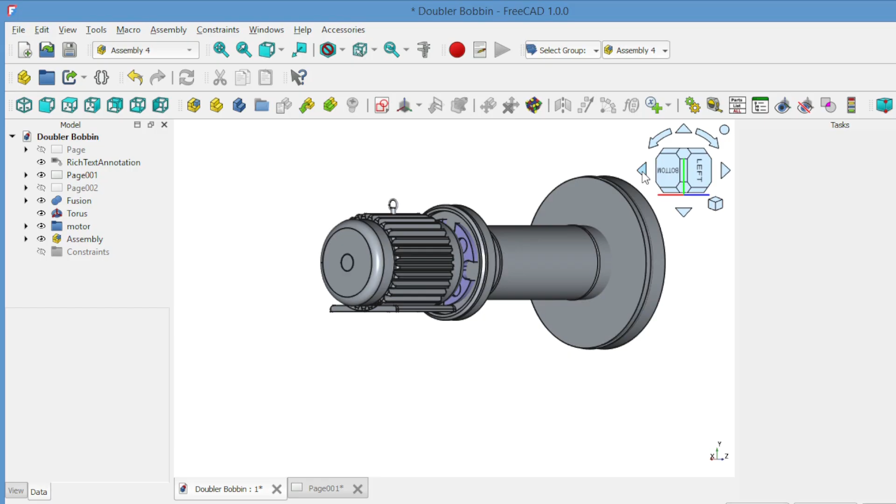Hello and welcome. Today we are going to show you how to create a doubler bobbin and torque motor using FreeCAD. This tutorial is very simple and perfect for beginners. The doubler bobbin is used in rope manufacturing, and in this video we'll also show you how to work on a torque motor spindle through an animation.

Let's begin. First, we'll create the larger flange of the bobbin. Open FreeCAD and go to the sketcher, select the XY plane and click OK. Now choose the circle tool and draw a 50mm circle. This will be the base of the flange.

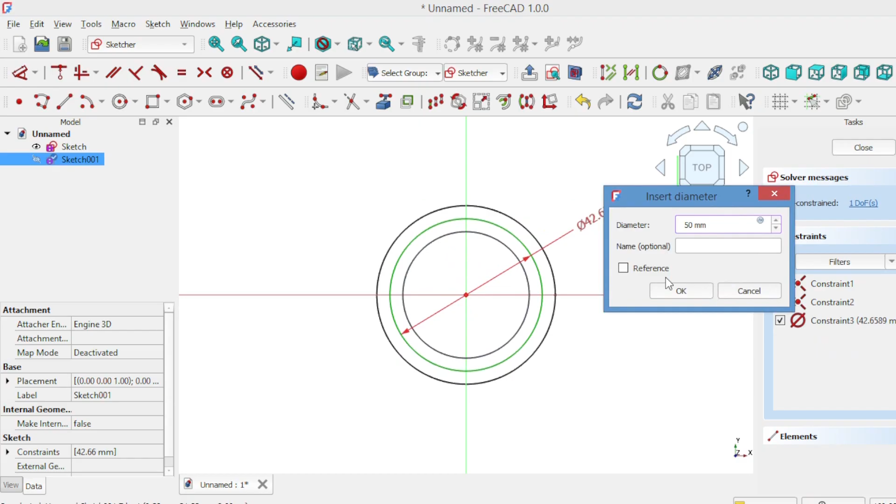Close the sketch. Next, create two more circles with diameters of 50 and 46mm as shown. Close the sketch. Then open another sketch on the XY plane and draw two circles for the middle tube as shown. Close it.

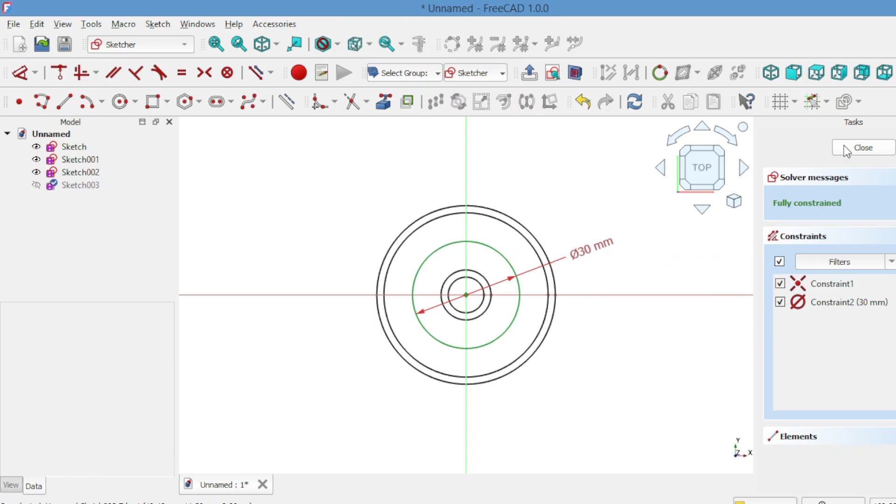Add one more circle of 30mm to fix the metal frame. Finally, create a ring with diameters of 40 and 38mm and close the sketch.

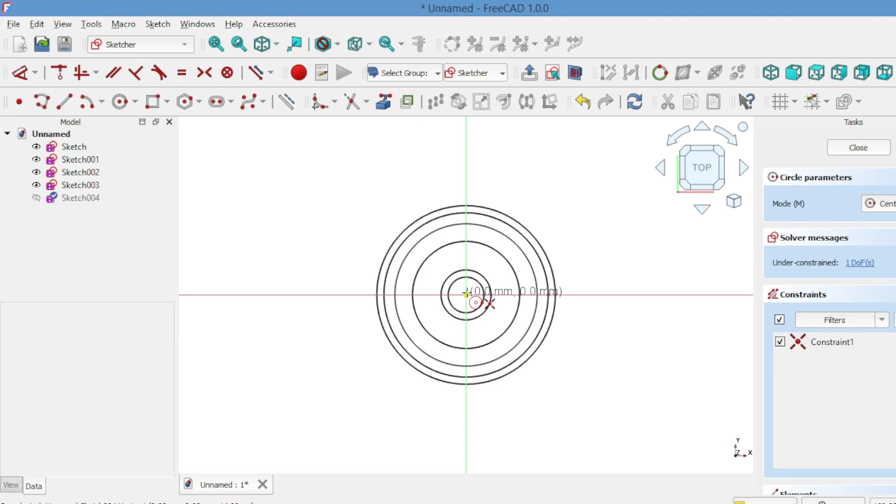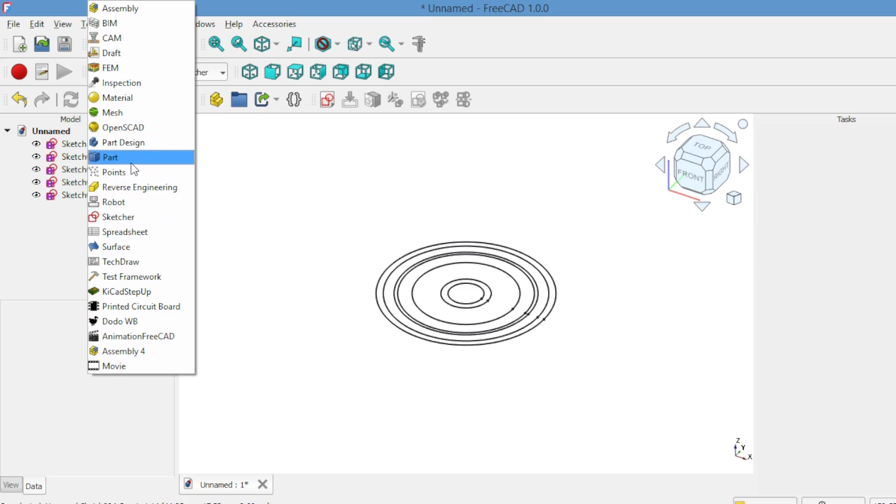Building the bobbin flange. Now go to Part Design and create a new body. Move all your sketches into this body. Using the Pad tool, extrude each sketch one by one.

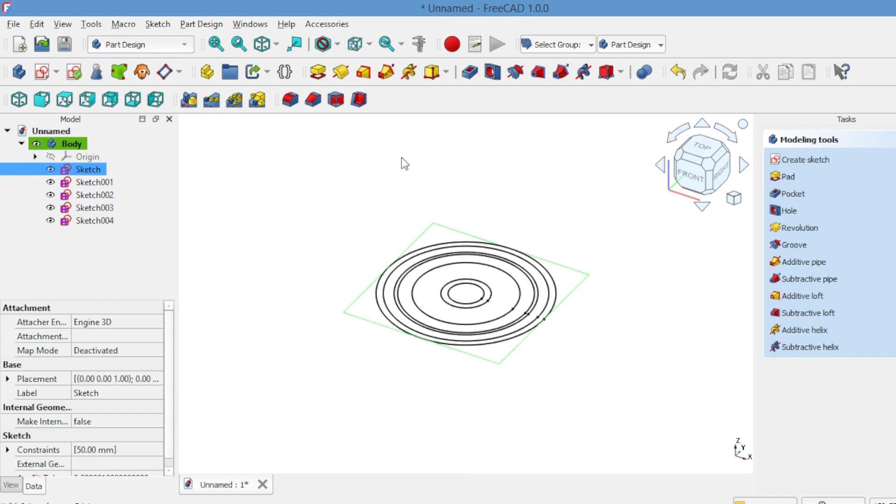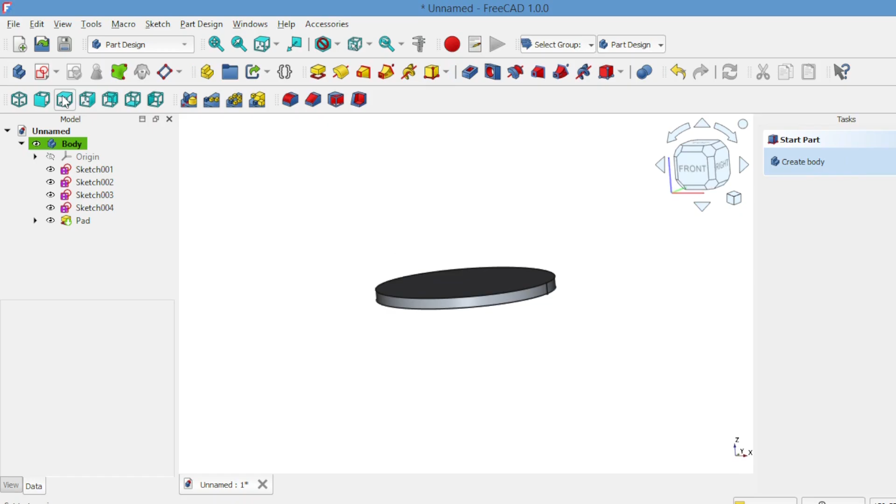Thickness 3 mm, then apply the chamfer tool to smooth the edges. The first circle 6 mm and smooth the edge with the fillet tool.

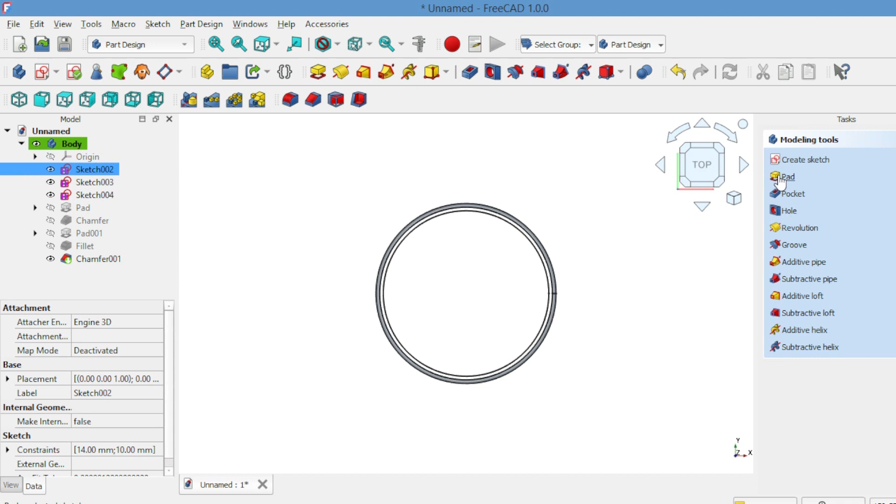The next sketch length 70 mm with reversed checked. The third circle 5 mm. The fourth length, the ring length 5 mm. At this stage, the large flange and the middle tube are ready.

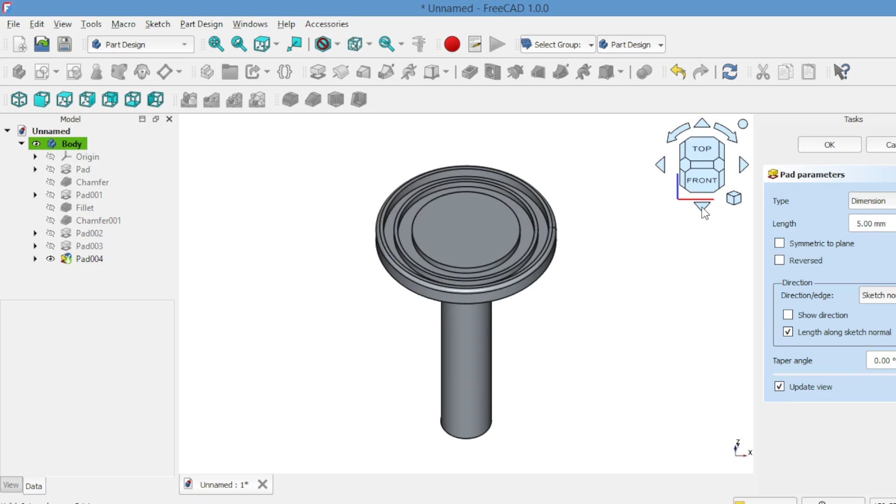Let's make the smaller flange on the opposite side. Create a fifth sketch on the XY plane and draw a 40 mm circle.

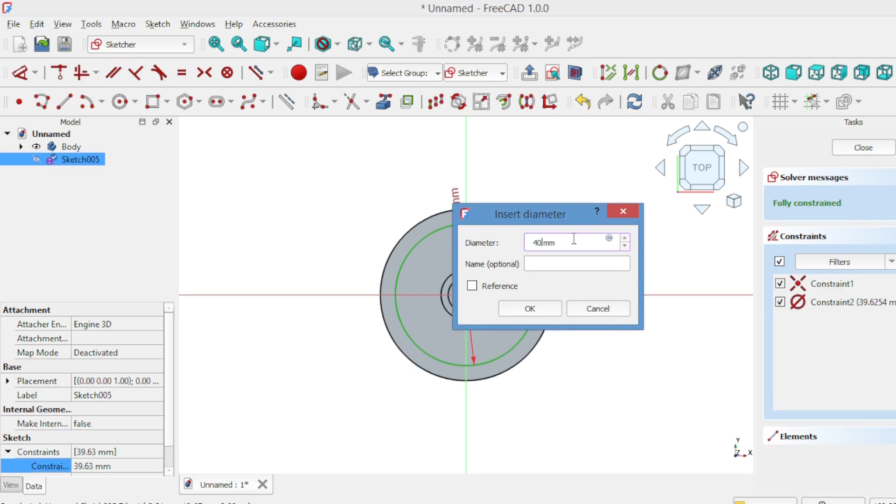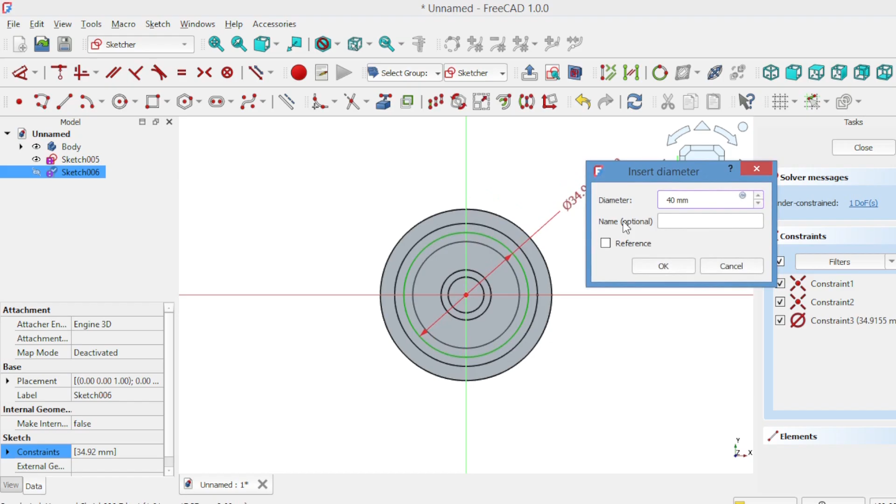In the sixth sketch, draw two circles of 40 and 36 mm. In the seventh sketch, draw a 30 mm circle.

Now create body 1 and move these sketches into it. Transform body 1 to the opposite side.

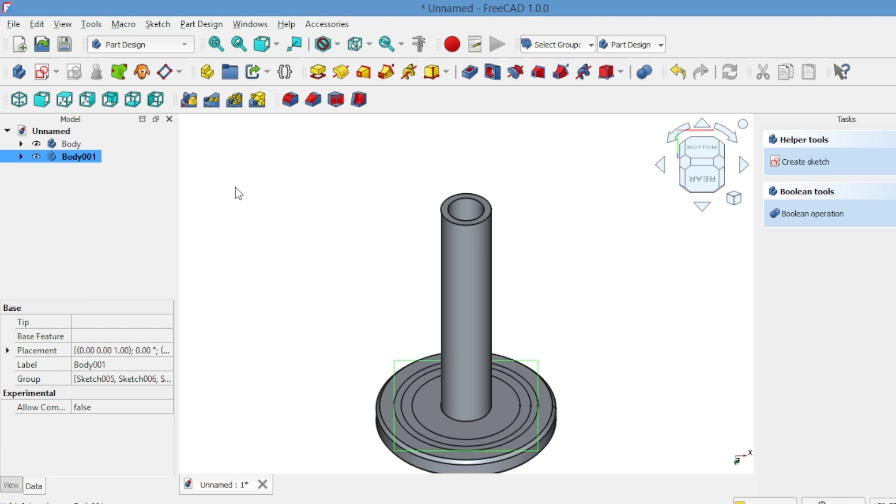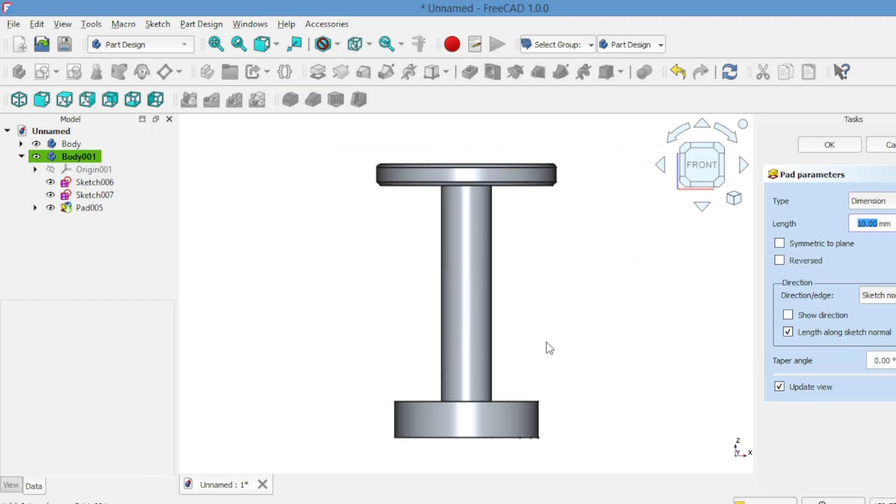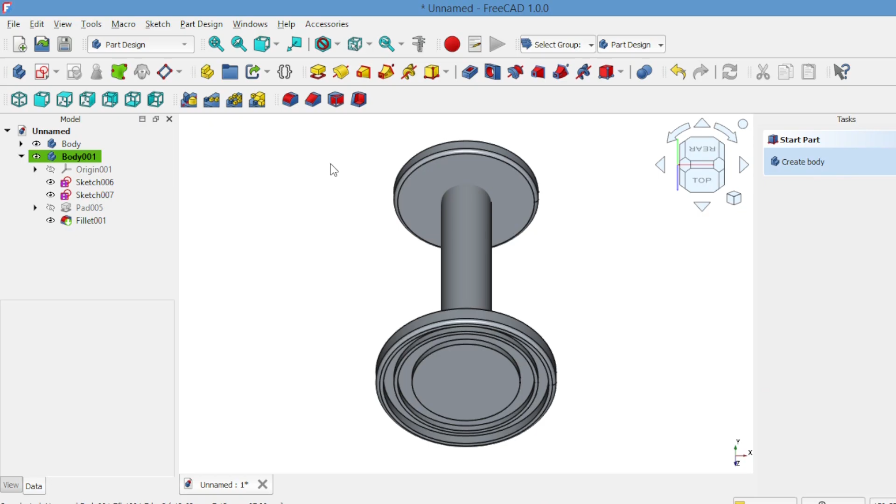Extrude them as follows. Fifth sketch, 4 mm with fillet smoothing. Sixth sketch, 2 mm reversed. Seventh sketch, 2 mm reversed with fillet smoothing.

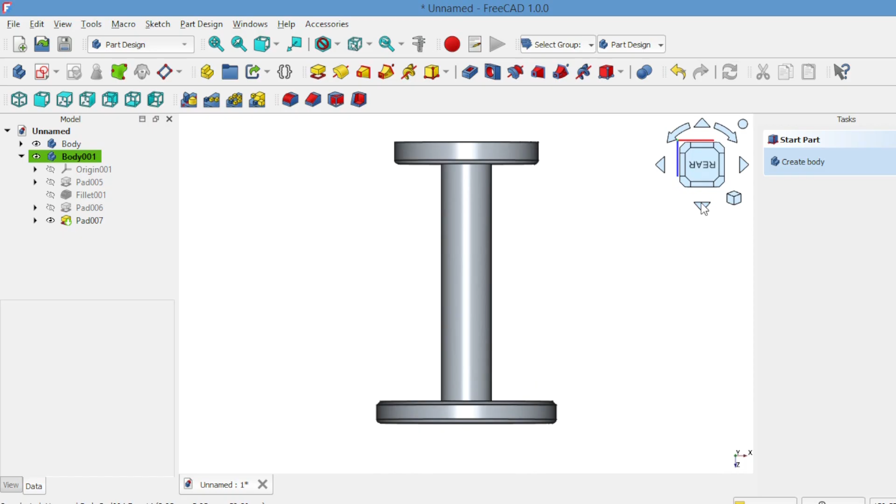Now the outer shape of the bobbin is complete. Adding support ribs and rings.

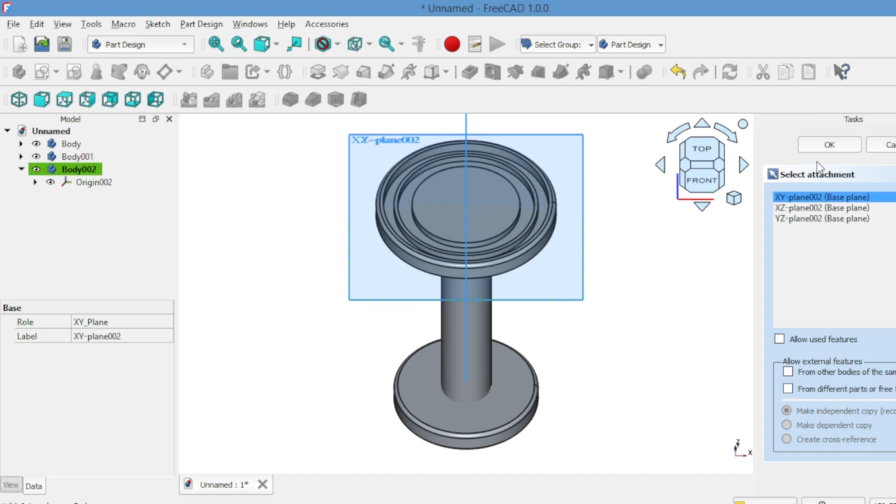Create body 2 on the XY plane. Draw a rectangle on the big flange. And extrude it to 4.5 mm. Smooth the edge with fillet.

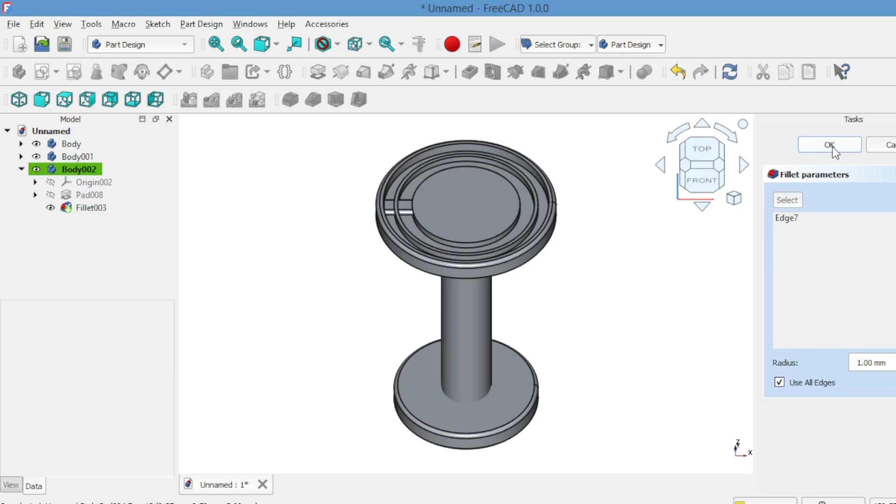Then go to the draft workbench, modification, array, polar array, set the number of elements to 8. Reset the center point and click OK. Now the inner flange has 8 support ribs.

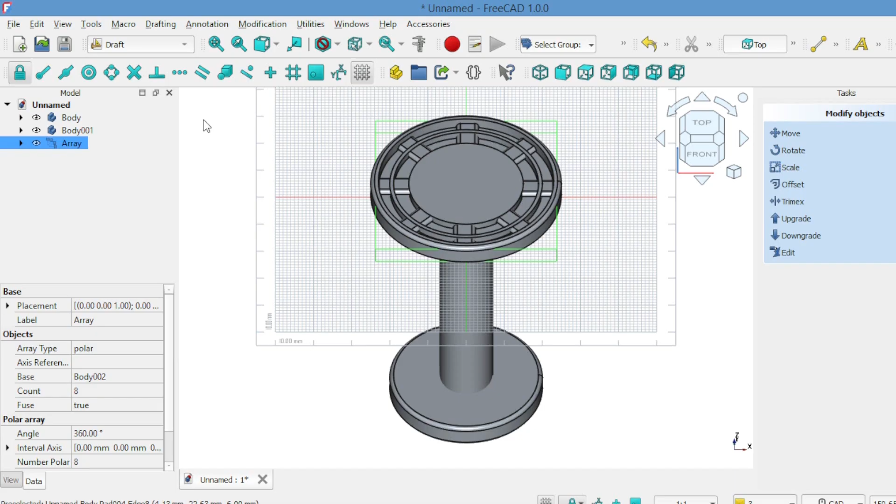Making the stem and middle rod. For the stem, create body 3, draw a 26mm circle and extrude it to 10 mm.

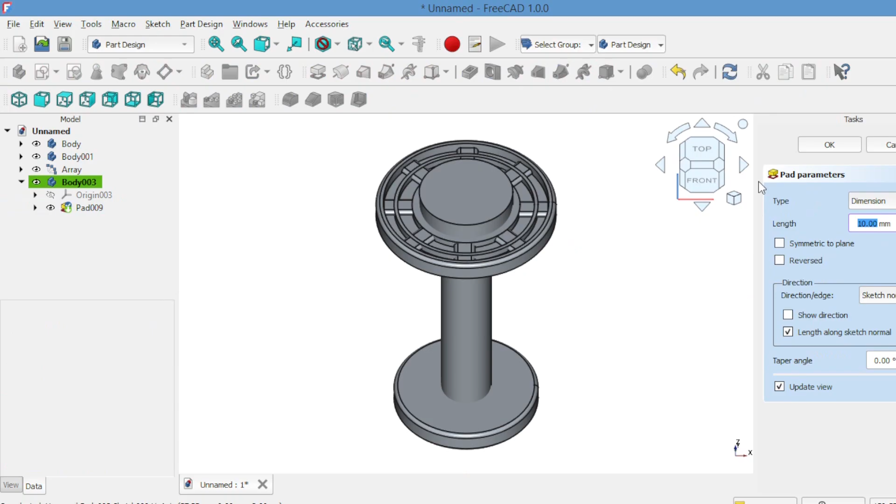Copy and paste it to create body 4 on the opposite edge. For the middle rod, create body 5, draw a 26mm circle, extrude it to 48mm and position it.

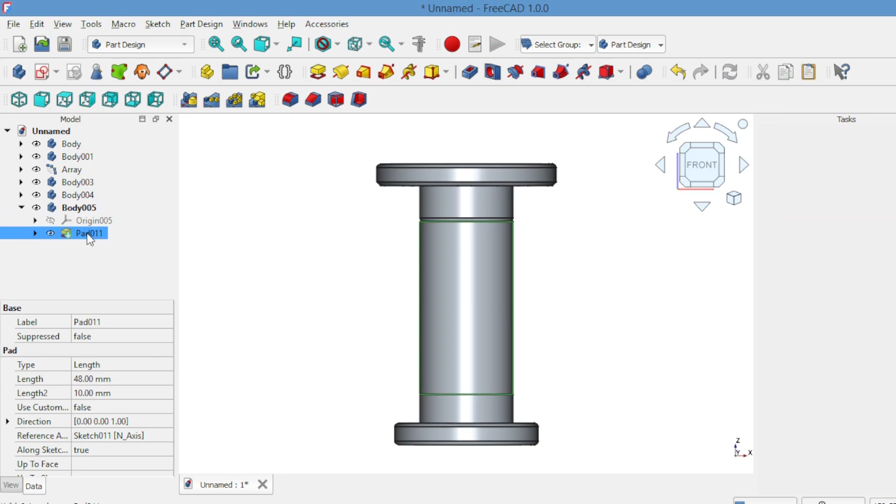For the outer support, use body 7 with the polyline tool to draw a rectangle with rounded corners. Extrude it 7 mm.

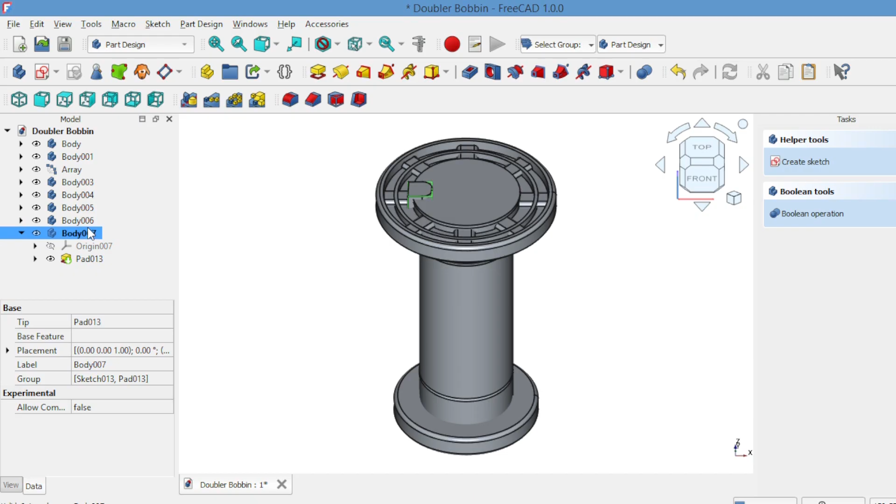Apply polar array with 4 elements. Use boolean cut to trim as shown and copy it to the small flange side.

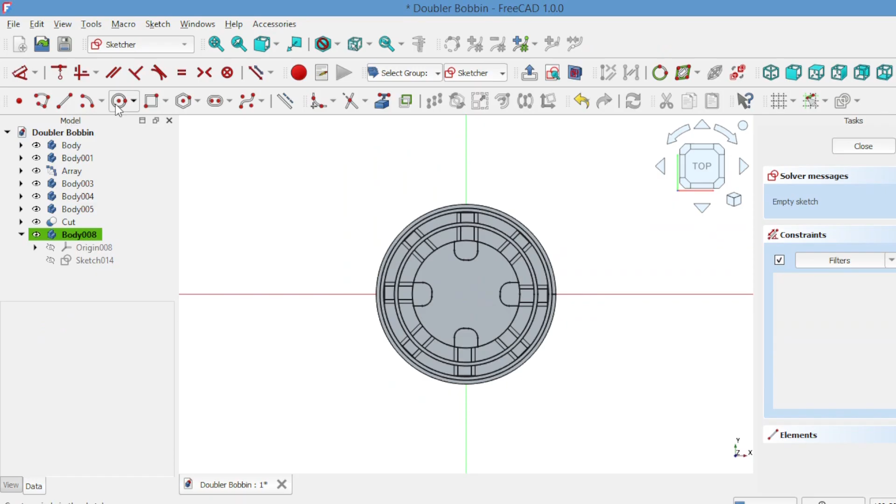For the central rod, create body 8, draw 2 circles and extrude them to 70 mm.

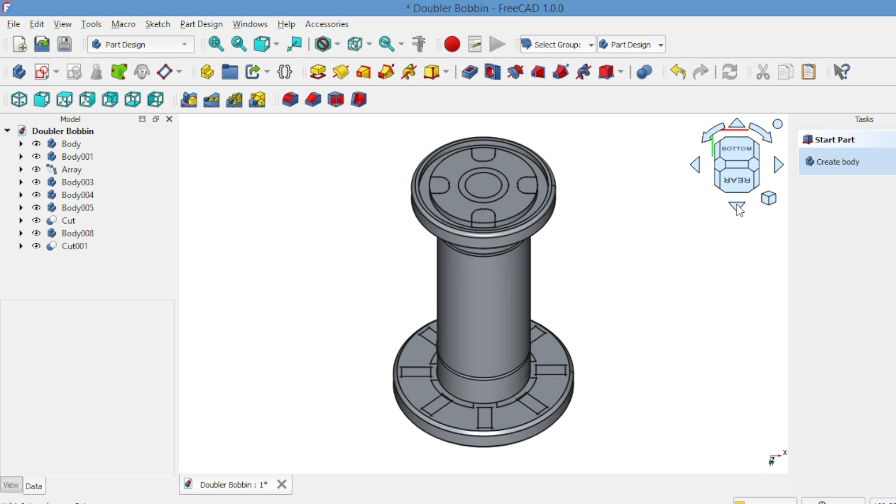For the holding circles, create body 11, draw small circles between the half circles, extrude them and apply a polar array with 4 elements. Perform a boolean cut to create 4 holes. Repeat the same process on the small flange.

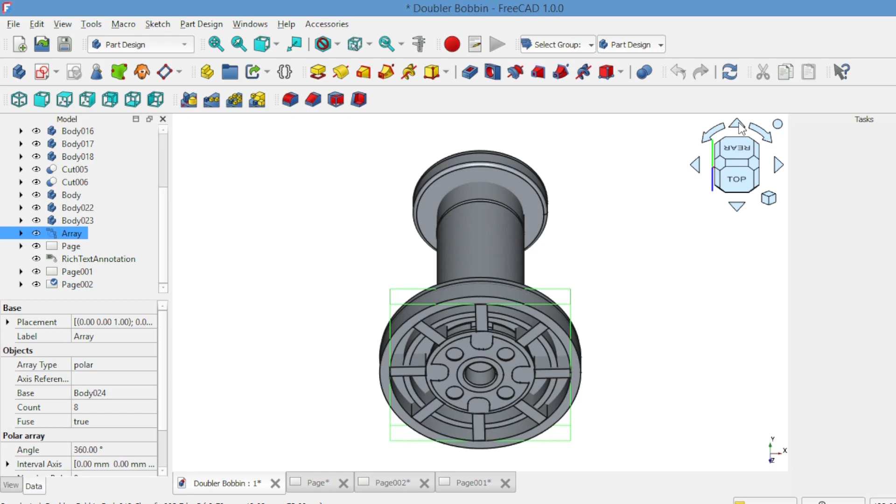Now the full bobbin is ready.

Motor and spindle. Next, let's build the torque motor with spindle. Create body 25. Draw two circles 30 mm and 6 mm. Extrude 8 mm. Smooth the edges and apply thickness for the bearing slot.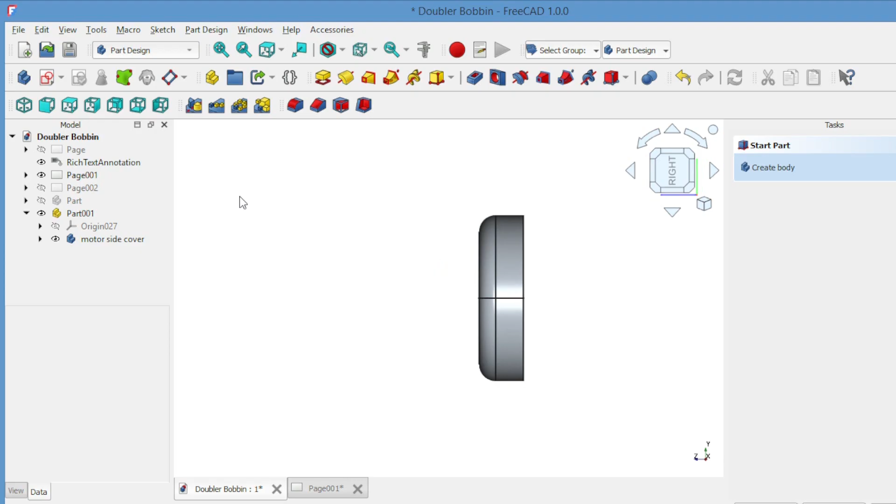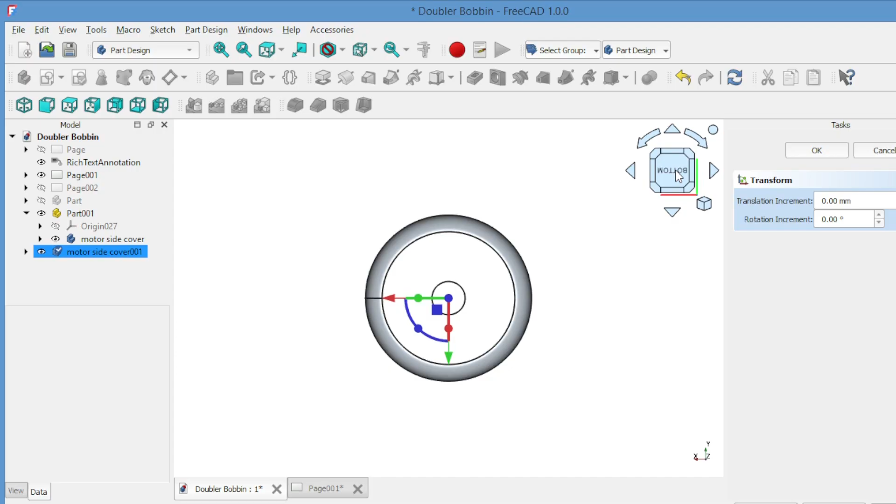Duplicate it to make both covers. Create body 27 with two circles 30 mm and 60 mm. Extrude and chamfer both sides.

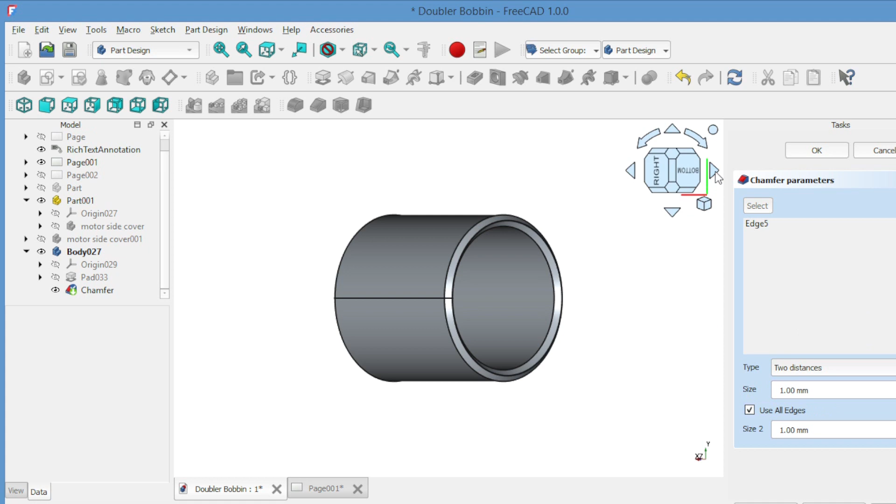Create body 28 for the cooling fins. Use the polyline tool, extrude 28 mm, fillet the edges, then make a polar array of 30 elements. Now the cooling fins are ready.

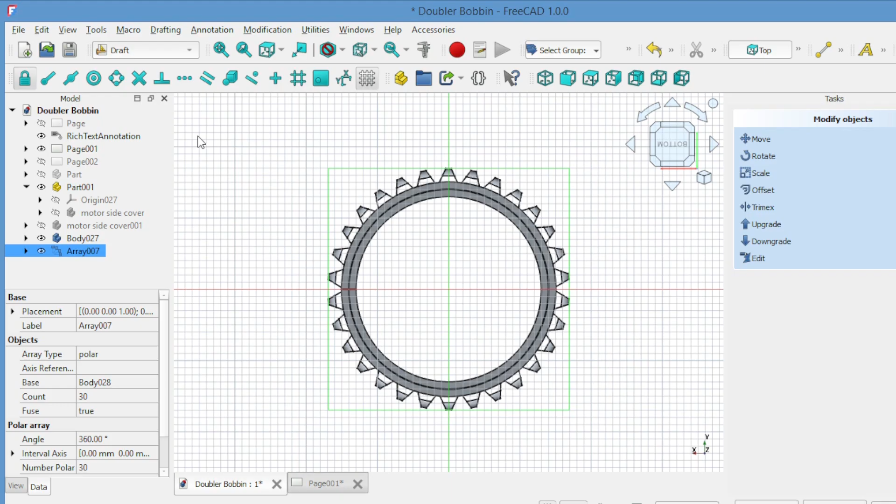For the base, create body 29 as a rectangle with curved edges. Extrude 28 mm.

Add elliptical bodies, body 30 and body 31. Cut them with Boolean tools and position the base.

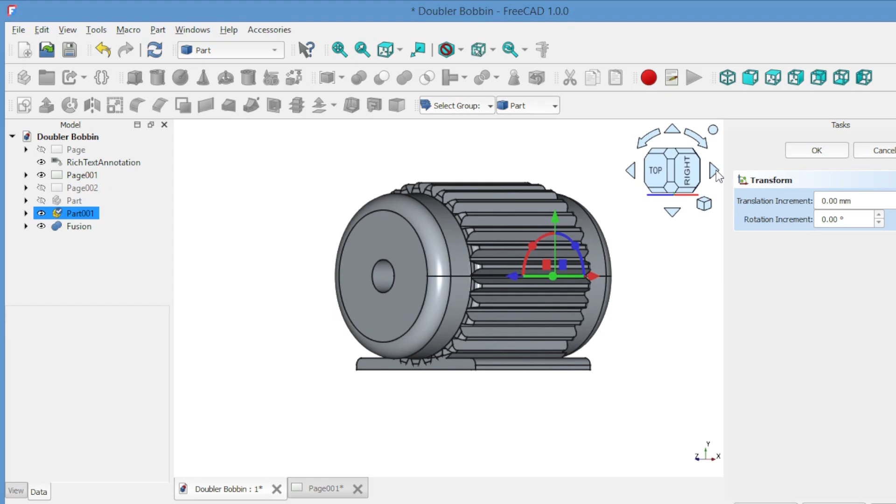For the shaft, create two shafts of different lengths, 50 mm and 70 mm, one with thickness for a hole, and insert them into the motor body.

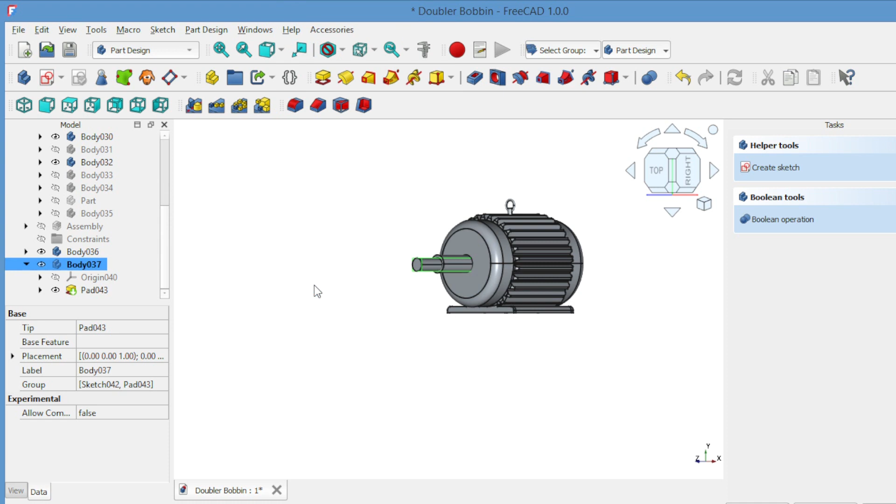Now the motor and shaft are complete. Place the bobbin on the shaft, connect the motor, and once power is supplied, the bobbin begins to rotate.

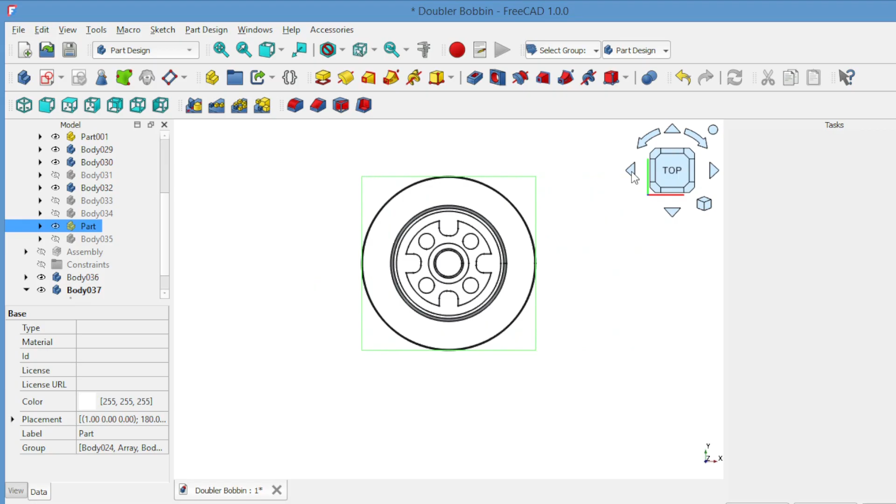And that's it. We have successfully created a doubler bobbin, demonstrated its use with a torque motor in FreeCAD.